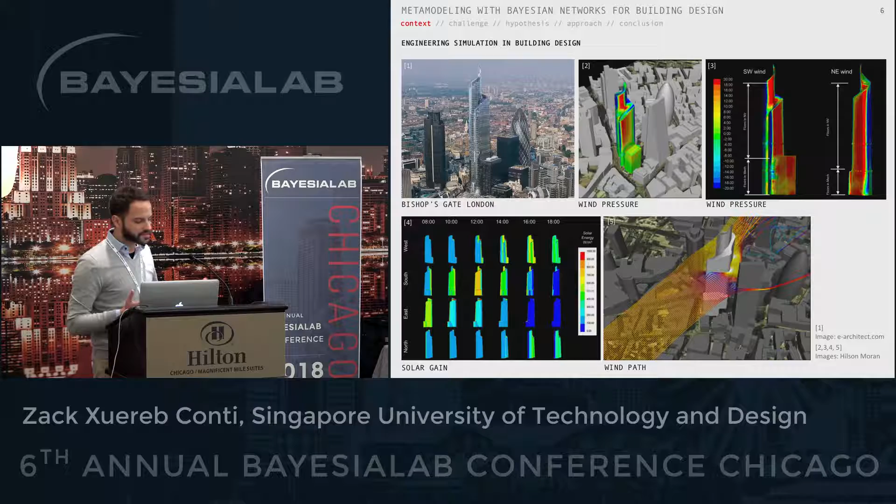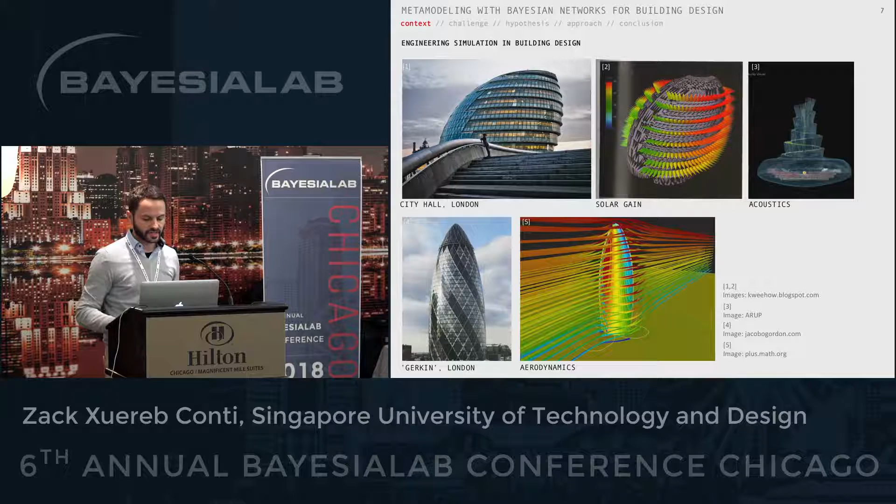And there are various types of engineering simulation, for example, understanding how wind affects the tower structure, how the geometry affects the solar gain of the building, even understanding acoustics in certain geometries, and so on. So the list is endless. But it is extremely important if we want to push boundaries of design. And in fact, simulation is helping reach new heights in design, quite literally.

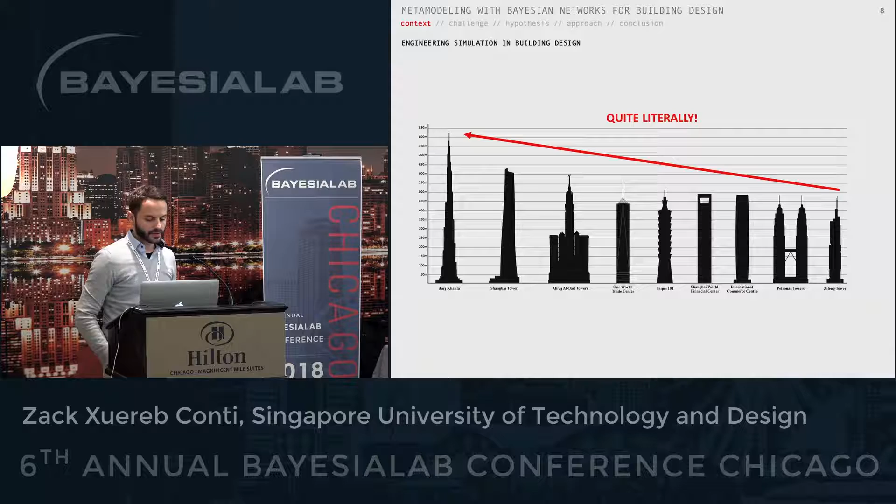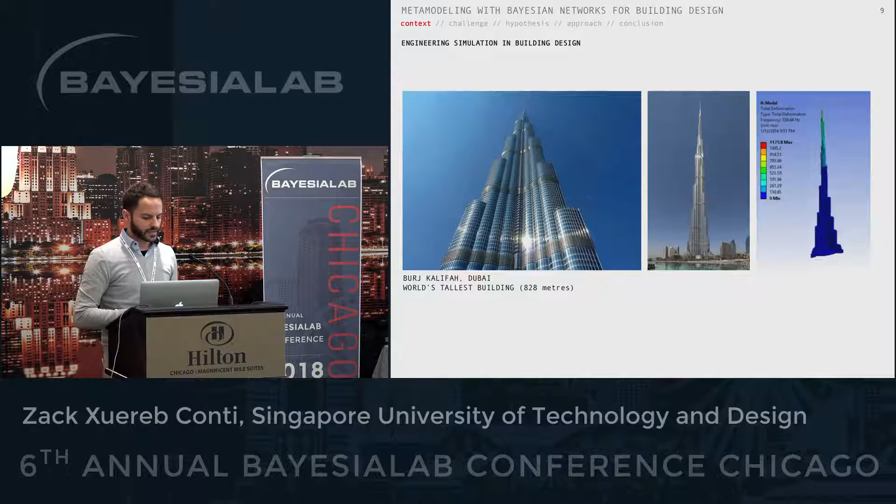For example, in the case of the world's tallest tower, it was important to understand how the building reacts to lateral loading due to earthquakes. And eventually, this information helped them understand where to place the pile foundations, and also the dimensions of these foundations and how deep they should be.

So this was all really important information they needed to understand beforehand, before construction, in order to feed back to the architects on how to fine-tune their design.

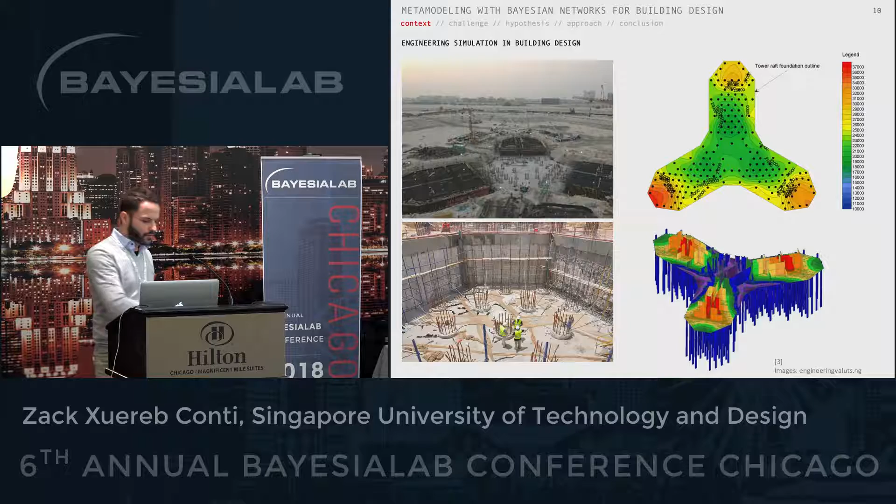So more recently, engineering simulation is now also being used by architects in the early stages of design, and it's actually become widely available. So there has been a shift in architecture where we can no longer design static geometry or static forms, but we actually design systems. So there's been a computational shift. Architects, even in education, are learning how to write code and how to design their own software tools, where we design algorithms to generate forms.

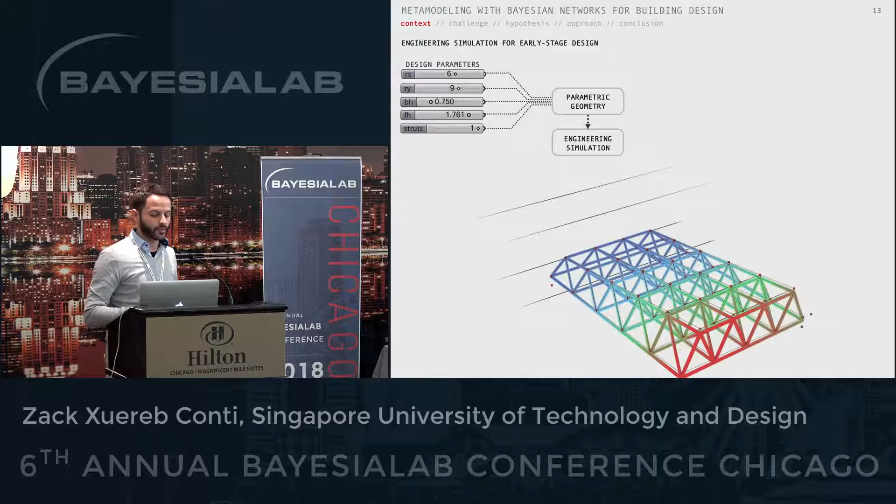So now with the availability of faster simulation, so faster numerical methods, and also with this computation framework, we can even couple engineering simulation with this sort of design exploration, so we can get quick feedback on our designs. And this is quite insightful when you're in the early stages. So this actually helps also the relationship with the engineers.

So when we're designing forms as architects, we're designing forms that have engineering intent, which means when we feed back to the engineer, eventually we're saving a lot of time as well, because the building we're designing actually makes sense from an engineering perspective. So it's feasible, or at least within feasible range.

Within this framework, you can also plug in some stochastic optimization to have some iterative search for forms that perform, that have, let's say, certain properties. In this case, it's searching for geometry that has a low deflection. Deflection being how much the roof structure is bending, which is important information, of course. So you can search space iteratively and generate these forms.

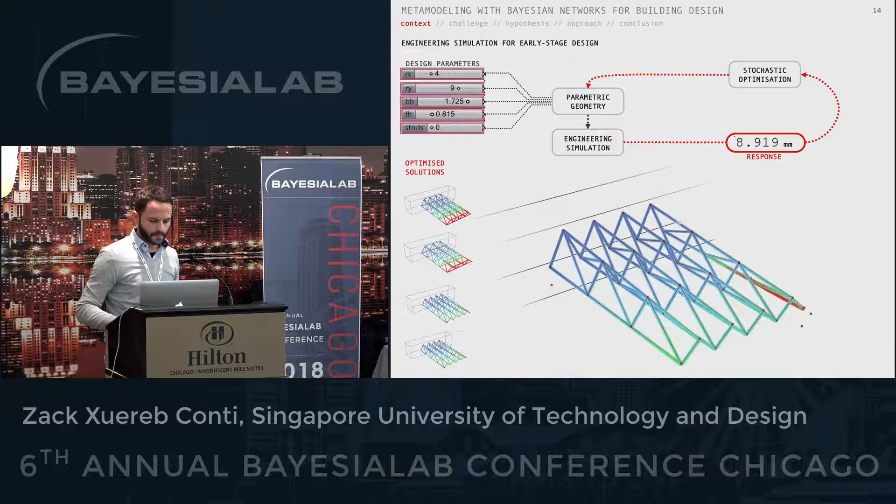However, the challenge here is that when we deal with multiple variables, design variables, so here in architecture we tend to call them design parameters. They are variables. So when we deal with many design parameters, which is normally the case in architecture, it becomes a challenge to understand. The system becomes a black box, and it becomes hard to understand the relationships between the design parameters and the response that we're getting. So it becomes hard to navigate this design space.

Eventually, we resort to these stochastic tools like optimization, which is in itself a black box. So there is no understanding of why we are getting this result. Even in the case of optimization, why is this the best result? In terms of the inputs, in terms of the design parameters, why is this the best result?

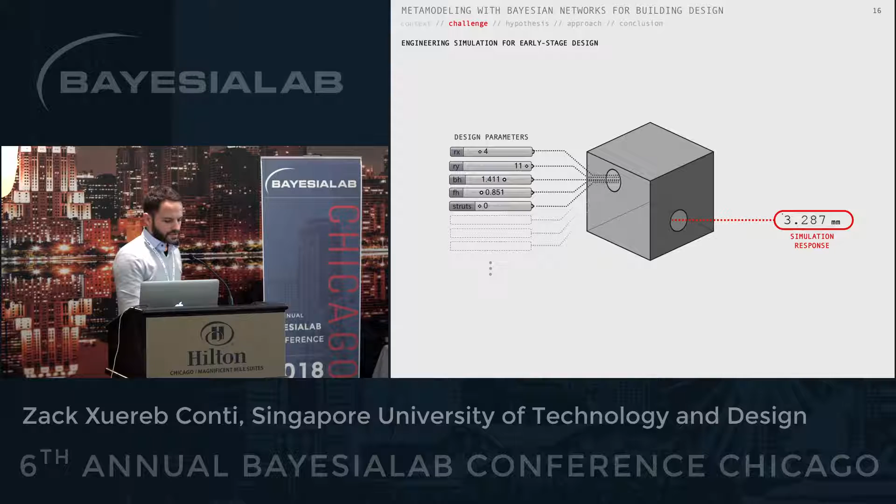So my approach is a statistical one, as you might have guessed, and the idea is to introduce simulation metamodels. So a metamodel is just a statistical approximation between the inputs and the outputs, and that is used as a replacement of the actual simulation software. So in the case of computationally expensive simulation in engineering, this is used heavily as a quick means to improve your design analysis cycles. So it's used in various fields, such as automotive engineering, in this case crash simulation, which can be computationally really demanding.

In facade engineering, understanding how glass would react in terms of its stresses when introduced to wind. And again, this is really computationally demanding, so in this particular example, they use neural networks as a metamodel. Even in aerospace engineering, from a non-simulation perspective, they use metamodels for quick onboard computing on drones. Let's say if there's wing damage, it uses metamodels to compute quick analysis and to re-update the flight path based on the amount of wing damage it's got.

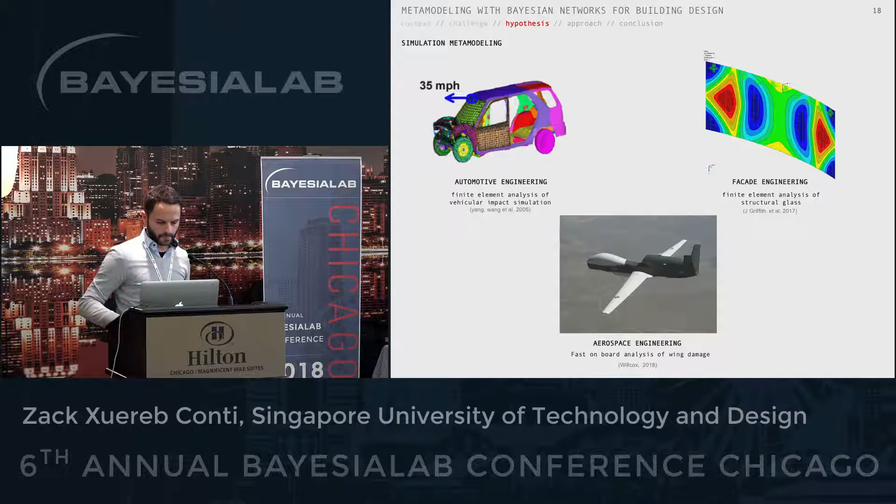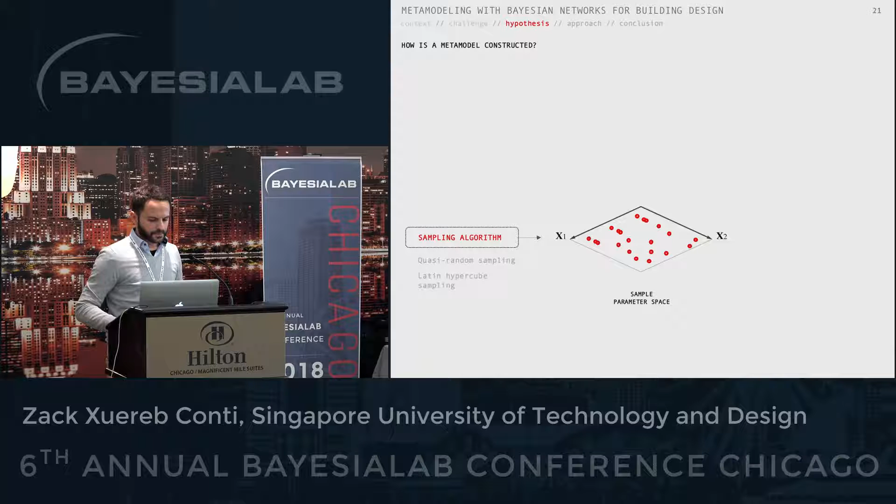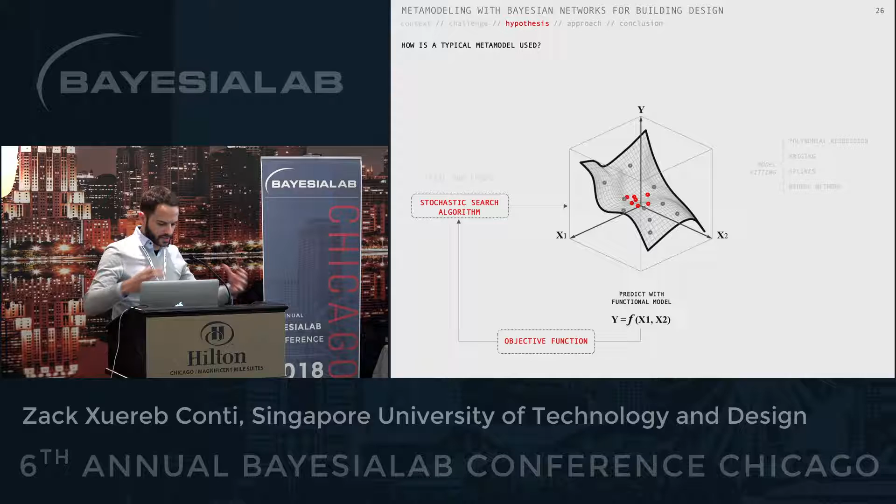Now most traditionally in engineering practices, because in architecture it's not done so much, typically you use methods such as polynomial regression, kriging, splines, and even neural networks. Once you have this model, of course, you can then perform analysis quite quickly. But the issue is that it is still hard to access the function. So you're limited again to trial and error, or stochastic search. Because when the number of variables is large, the function is still inaccessible to question why the inputs are affecting the outputs. So the problem of knowledge extraction is not solved.

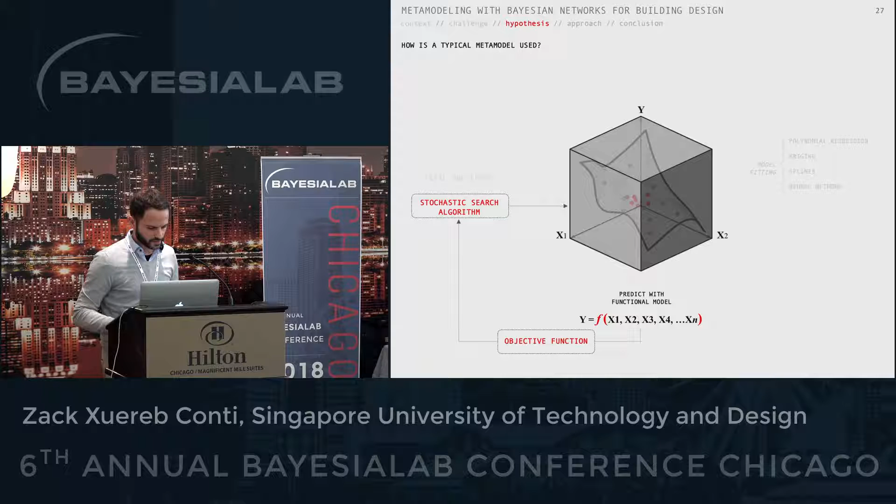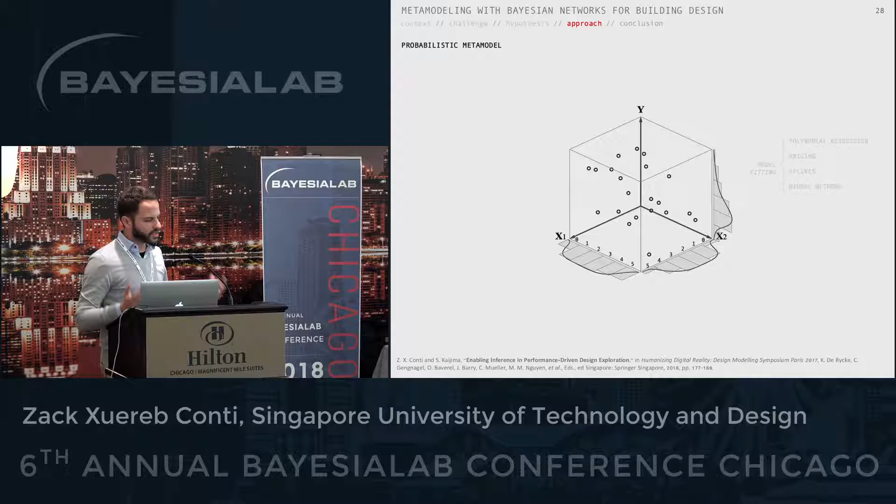So this is where we take a non-parametric approach. This is my very conceptual illustration of a joint probability distribution, as I had to explain to architects and designers what it is. So over time, I had to develop some form of story. So instead of compressing the data points into functional relationships, we consider all the data points that we've sampled in the space as a joint probability between the inputs and the outputs, so between the design parameters and the simulation response from data. And we use Bayesian networks for this.

So the network itself is quite simple. The topology of it is quite simple. It's just inputs mapped onto the outputs, and the design parameters are introduced as random variables, as nodes into the network, and the distributions, the priors, are simply frequency distributions from the data. So it's not a causal model, it's just an observed model from data. And actually generally these distributions that I'm showing here should be somewhat uniformish, because when we use the quasi-random sampling algorithm, it generally looks uniformish.

And the idea here is that as opposed to functional models, typical metamodels that are limited to forward operations, with Bayesian networks there's no direction, right? So we take full advantage of this bidirectionality, which is extremely helpful, and I will show how in a case study.

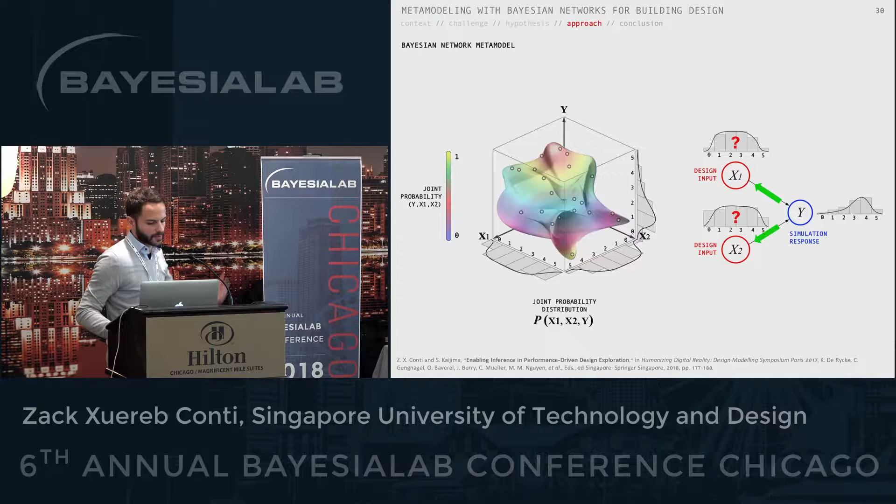So Bayesian inference here helps us, as I like to illustrate, slice the joint probability distribution to reveal the dependencies of certain queries we make. In this case, forward, which is simply prediction of the simulation response, but more powerful is the reverse, which is predicting the posterior.

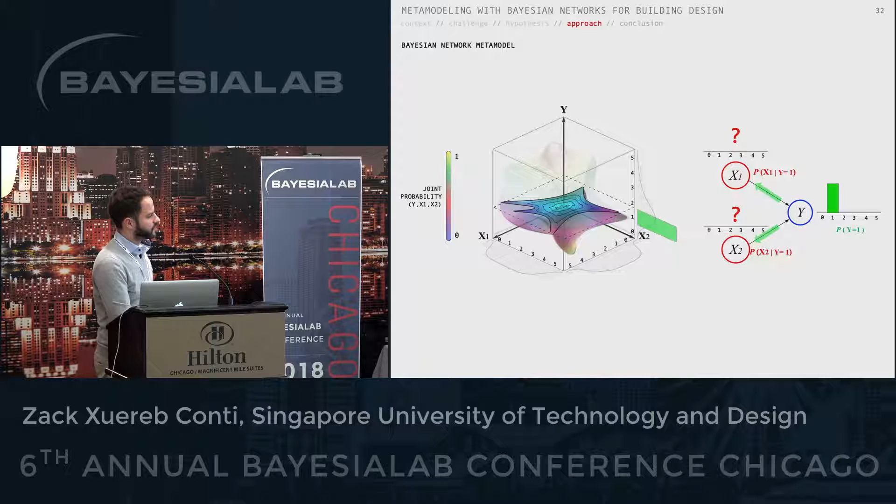So understanding which inputs will give me a certain output, and in the case of engineering simulation, which geometries, which building shapes, which structural shapes will give me a certain deflection in a range that I'm interested in, which is extremely powerful. Again, I will show this in the case study.

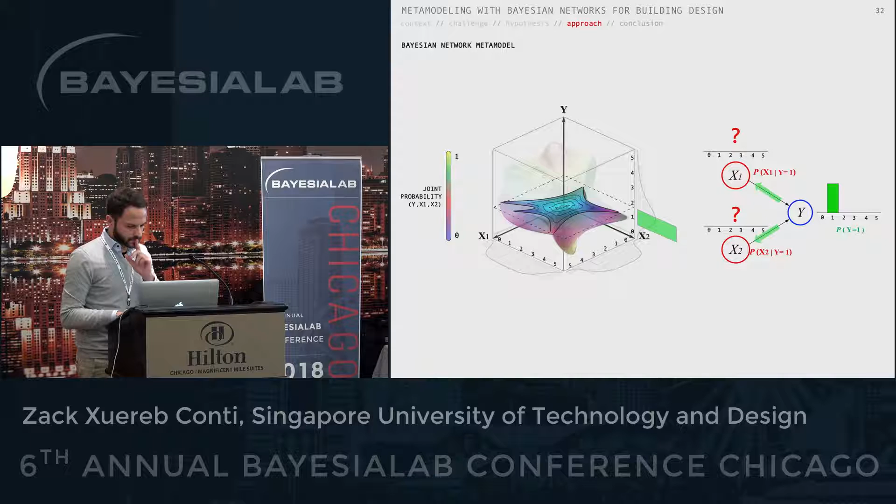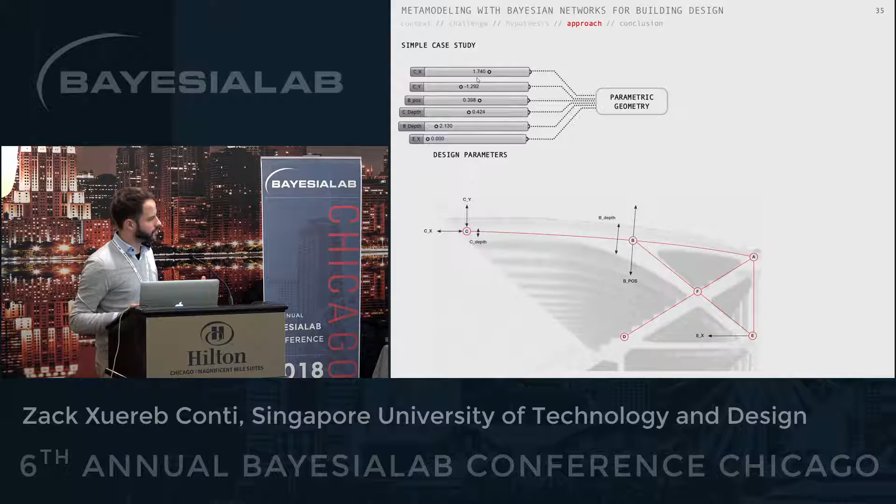So here again we build this so-called parametric model. We select our parameters, we build this parametric model of the geometry. We then plug in the analysis, and once we have this framework, one point is, as you can see,

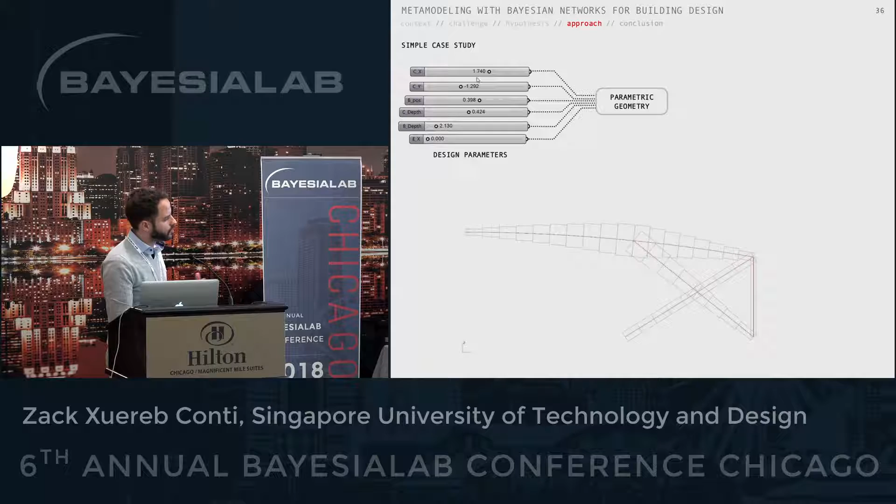if I go back a step, let's say we know nothing about the behavior or have limited understanding in solid mechanics. As an architect, as a designer in the early stages, it's difficult for me to make inferences about which geometries are going to behave in a feasible manner. And this is simply an issue of the number of parameters we introduce. Normally we want to have a lot of parameters because we want a lot of control, and also many more options in the design space.

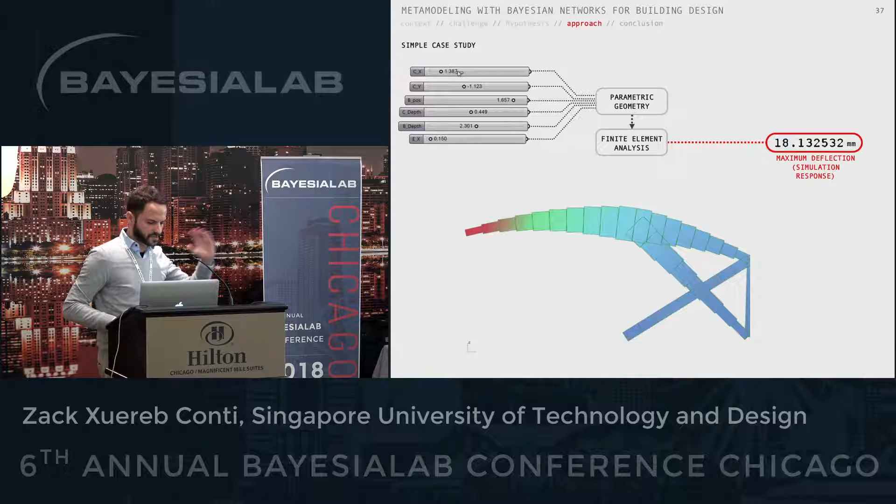So, okay, we have the setup, and what we do is we use a sampling algorithm to sample the inputs and generate data. So the data is basically your input vectors, which are your sampled inputs, and the resulting response from each iteration. For this particular example, we used around 4,000 data points. So we have full control over the data, over how many data points we want.

Although one limitation is that when the simulation is expensive, it kind of contradicts the scope of building a model. But the justification is the knowledge extracted is insightful. Later on, I will discuss some quick approaches to reducing the dimensions of the problem to require less data.

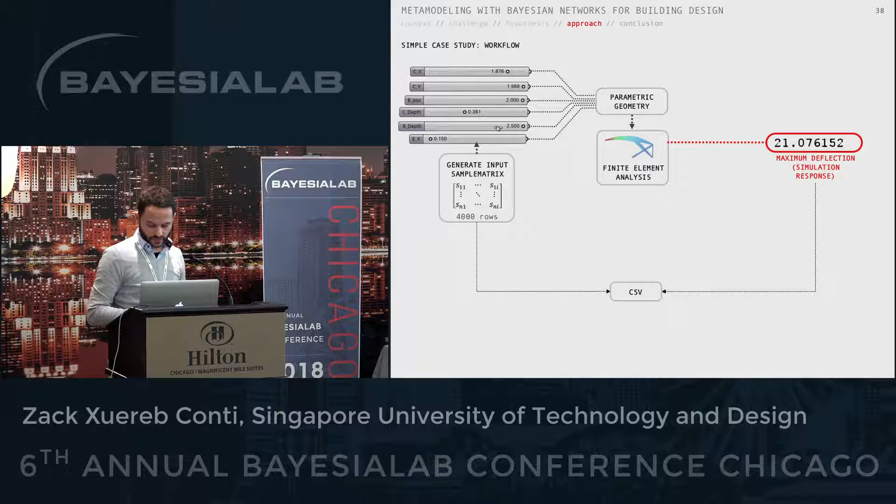Because having too many edges in a node can give you a massive conditional probability table, I reverse the nodes, which does not affect the results or the posterior distributions, but it's simply a hack to avoid having a massive table. Again, because this is not a causal model, it does not matter.

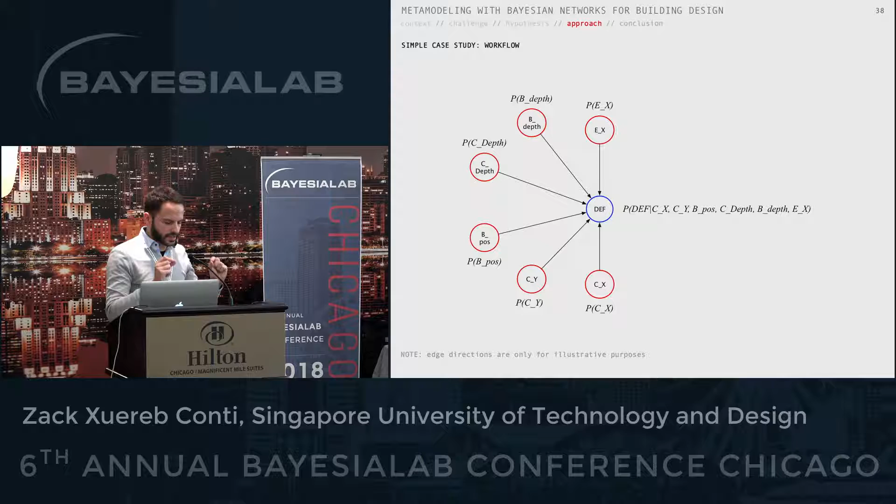So to give you a little insight, to communicate Bayesian networks to designers and architects, I had to leave BayesiaLab and implement some form of user interface that designers can play around with. To give you context, this is the software environment we work in. This is kind of like a 3D modeling software,

and on the right-hand side you have this plugin called Grasshopper. There are various alternatives, but this is the most famous one, where we design these algorithms and assign these sliders to control form and generate different geometries.

It's quite powerful, and this little plugin has all these new connections to simulation software, so you can really plug in everything into one model, and at the same time visually illustrate the results on the left-hand side. So what I did was I tried to introduce Bayesian networks into this environment.

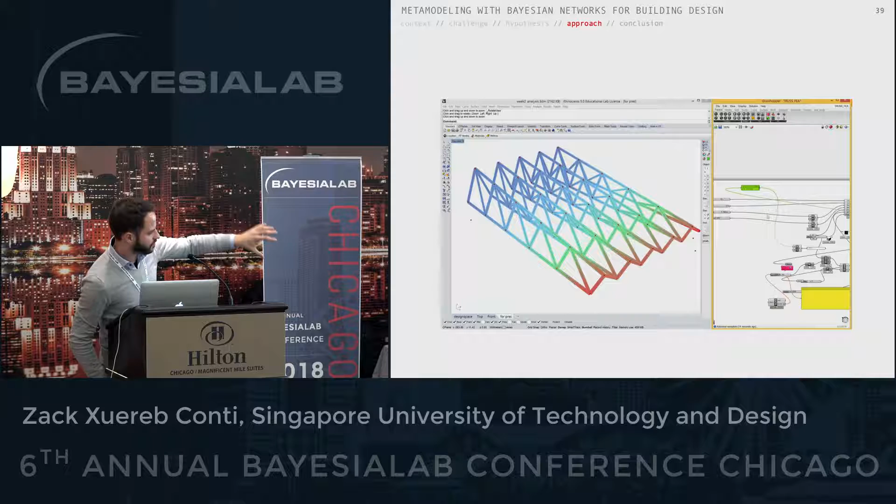So using the same language of sliders and these kind of spaghetti, I developed these histograms above the sliders. So the idea here, with regards to our problem, is let's activate this. So this is the marginal state, right? They look somewhat uniform because of the sampling algorithm, the inputs. And on the right-hand side is our output, the deflection of the structure from the data. It's just a frequency. Again, so we can perform bi-directional inference.

So let's say we want to predict the deflection of a certain structure that has these particular input values, and the mean of the distribution actually matches the actual value in the simulation. Now, what's more interesting to us is the reverse. So the designer can simply say, I'm interested in structures that have a deflection of a certain range. In this case, I'm not sure if it's visible, but it's like 40.13 millimeters. So the posteriors are updated, and it gives a quick insight.

So again, when we deal with architects and designers as well, we try to make things intuitive and sort of visual. So here, at first glance, you can tell where to search in the design space, where are the feasible regions in my design space to give me certain structural shapes that are efficient, that are going to give me a deflection that I've queried.

So, for example, here, what I'm doing is, the designer can literally just search in the bins with highest probability. Basically you reduce the vague design space into a smaller design space that's more meaningful to my query. So all geometries that are found within the highest bins are all engineeringly feasible.

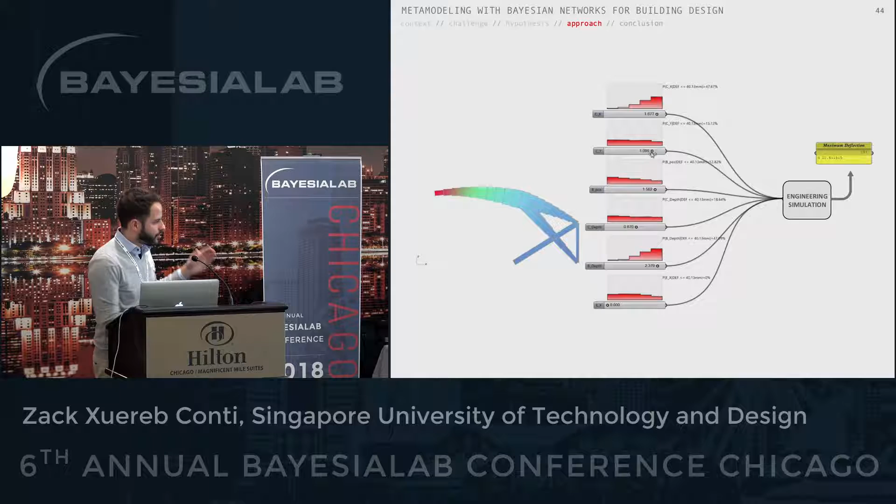So again, if we reduced that space, and here I just randomly generated the designs within those ranges only, so within the meaningful ranges, the bins with the highest probabilities, and they all fall below the queried deflection, which is 40 millimeters.

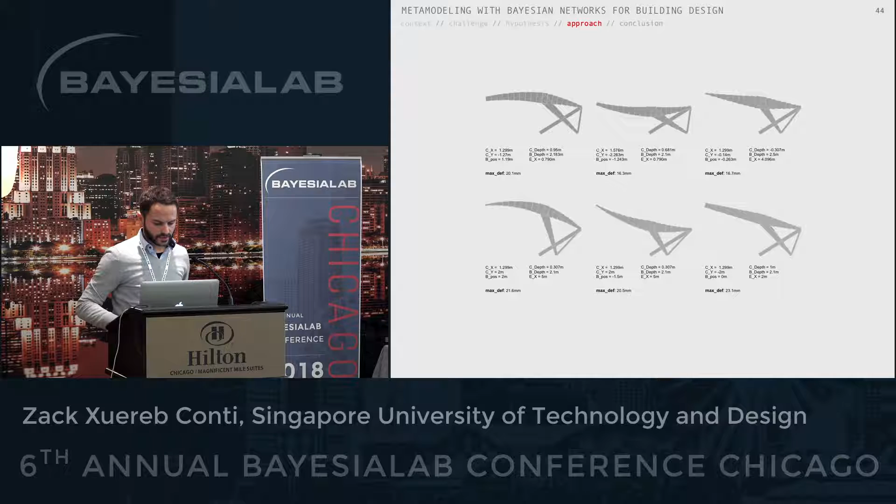Also, the cool thing about Bayesian networks is that you can also have multiple outputs. So we can explore trade-offs between objectives. In this case, I'm talking about the weight of the structure and also the deflection of the structure, so the amount of bending of the structure.

And we can query both of them, and that's actually really powerful because now we can find regions in the design space that will actually satisfy both queries, which is doable in, let's say, multi-objective optimization, using some form of stochastic optimization. But again, it will simply give you one result or a range of results, but not give you more insight into why this is happening.

And the same for the multiple outputs. So some limitations and some problems that maybe you guys are probably more experts than I am in, and that I've seen also as a common limitation amongst us, is the discretization of the variables. So in my field, the discretization not only has to make sense in terms of the model, but it actually needs to make sense for the designer.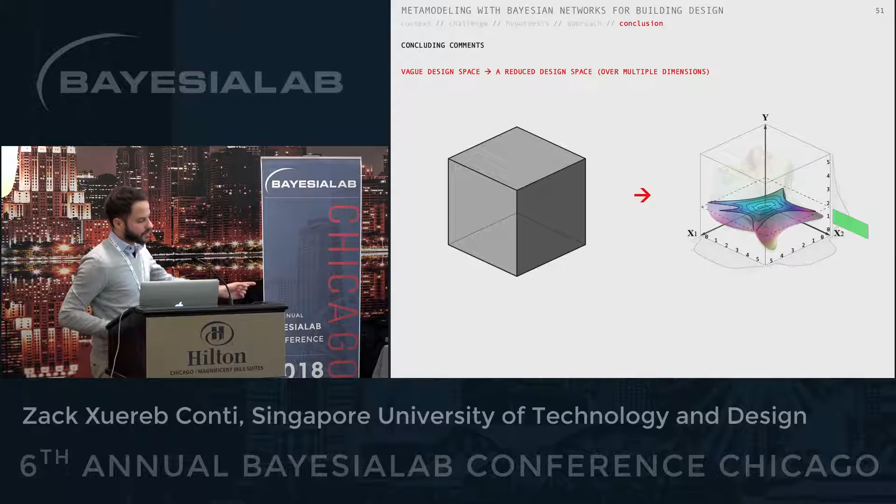Also, this is my BayesiaLab slide, by the way. Finally, the great thing I think is that you can get meaningful insight over so many dimensions. In this case, if you have many inputs, which, again, is really hard to do with the traditional approach that we use, just using stochastic optimization or just trying to find designs by trial and error. So it's extremely powerful.

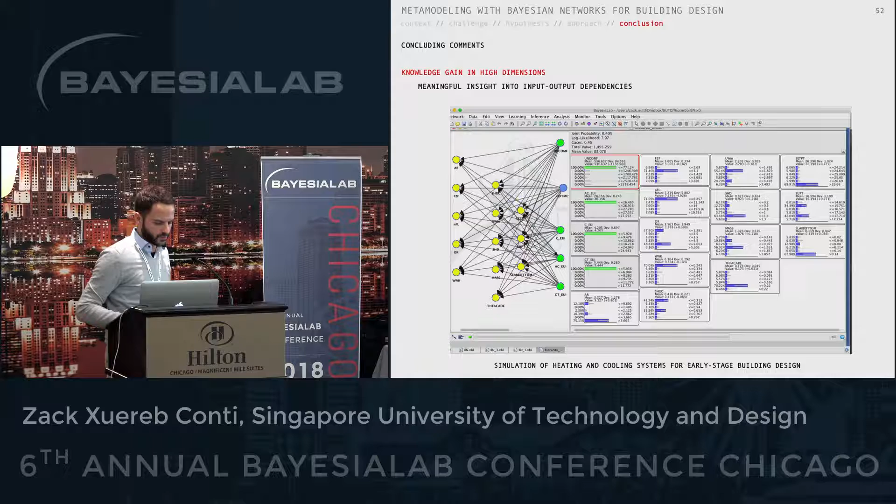In this particular example here, it's from another type of simulation involving heating and cooling of a building that I was helping a colleague with. They were doing all these complicated sensitivity analysis methods, but immediately, when I just plugged in the data and queried, let's say, the lowest of the outputs, because they were trying to minimize the outputs, I could immediately know where to search in the design space to give us those building designs that will satisfy those criteria. So from an optimization point of view, it's quite powerful, I think, in a design sense, of course.